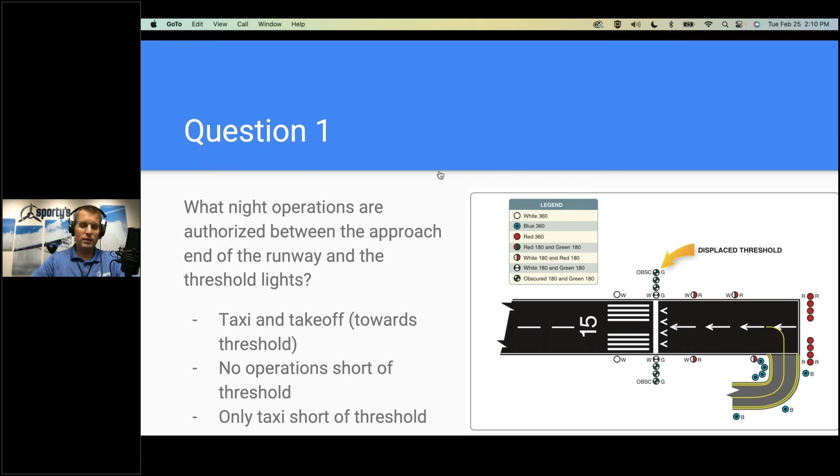Looks like the overwhelming winner here is A, taxi and takeoff towards the threshold. That's 72% of you voted for that one. Second place was C, only taxi short of the threshold. You are correct, good job everybody. A is the correct answer: taxi and takeoff towards the threshold. Only taxi short of the threshold was a pretty good distractor there. Some of you bit on that one, but A is the answer.

So why do we care? Let's do a quick review of runway markings, because we assume when we fly IFR that we're going to shoot an approach, and at the bottom of that approach is going to be the beautiful runway. And we did it, and we found our way out of the clouds, but it's not over until we land. And sometimes there's a moment of almost panic when you see the runway and where actually is the runway?

Which part's the runway? So to review, on the left, we have what's often called a blast pad, those chevrons. There's really nothing there. You should never be on that surface. That is an overrun, that is the blast pad, as it's alluded to. That is not for your airplane on it. The one in the middle, you notice there's a subtle difference there. It's still yellow, but there's a center line there. We can taxi on that, but because it's yellow, there's no takeoff or landing.

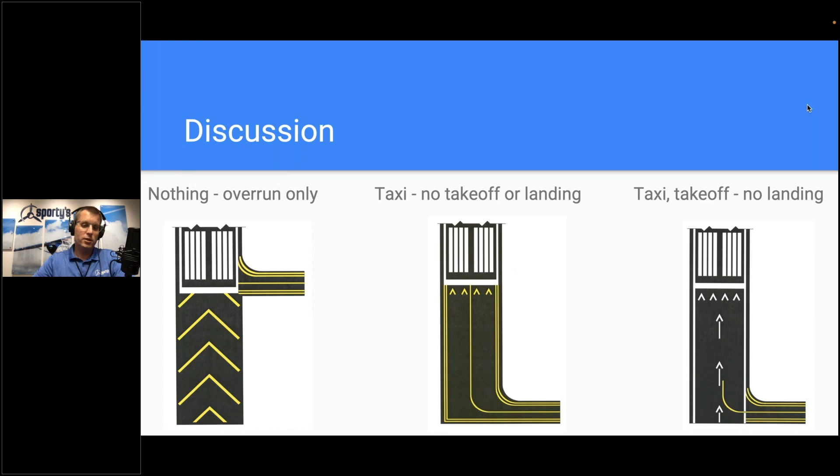That's just taxi. The one on the right, we have white and arrows pointing towards a threshold. That one we can taxi and take off on, but not land on. Maybe that's review for some of you, but I always like to go through the details because especially as you get to bigger airports, that can be a little confusing. So here's the way I remember it.

In general, yellow means a taxiway. So if you see yellow, even if it's in line with the runway, yellow means taxi, not runway, not takeoff and landing. White means runway. If it has a centerline stripe, you can probably use it as either a taxiway or a runway. If there's no centerline, like you see here with the chevrons, that means it's an overrun or a blast pad. So there are finer points and some distinctions, but in general: yellow taxiway, white runway.

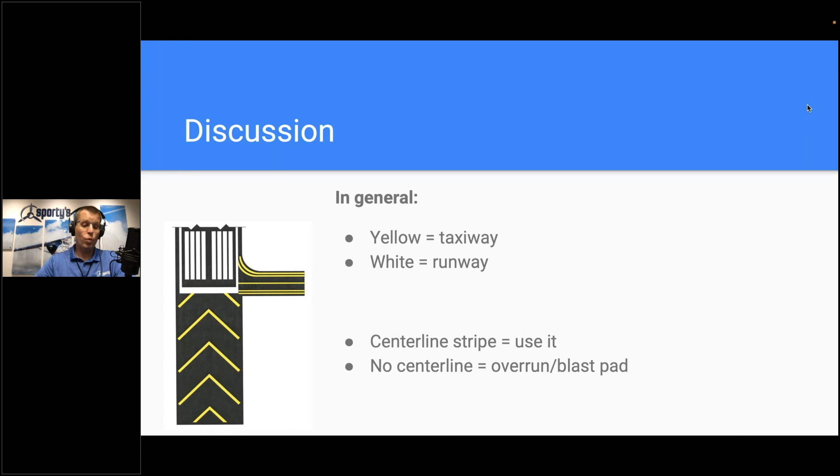Now at night, you can't see all of those, so we depend on the lights to help us there. When it comes to night, green is your friend. Not surprisingly, these colors are not picked at random. You can see in the example here on the screen, the green row across the threshold. That is your signal. That's where we can land.

So if you break out at the bottom of that approach, you can see here there's a blast pad and a displaced threshold. The white leads you to the green. The red says don't land here—you might be able to taxi there—but at the bottom of the approach, look for those green lights. That is the runway threshold. That is your friend, and at night, that's really what you're looking for.

When we talk about seeing the runway environment and being able to continue below minimums for landing, that green threshold line is about the best thing there is. All right, so there's a warm-up for you on runway lights.

Let's go to question 2. We're going to talk about icing. So approaching your destination, you pick up a half inch of rime ice in your descent through a cloud layer. You're now in the clear with unlimited visibility and a temperature of 35 degrees Fahrenheit. You decide to: A, not change your normal landing speed; B, approach with a slightly slower landing speed; C, approach with a slightly faster landing speed.

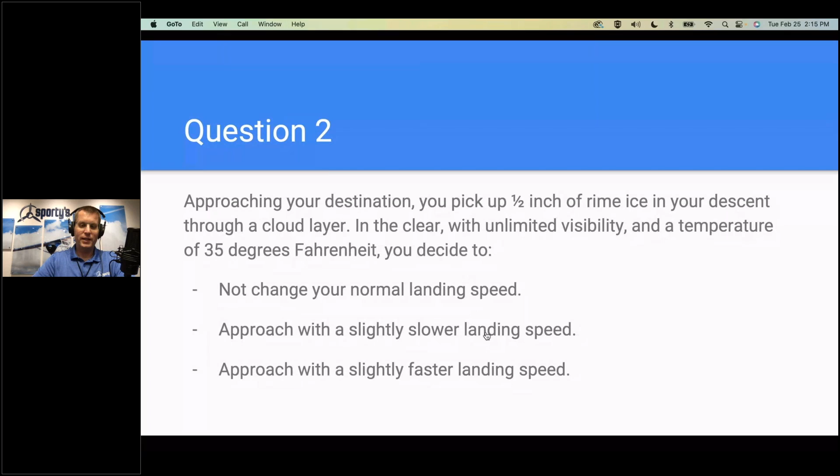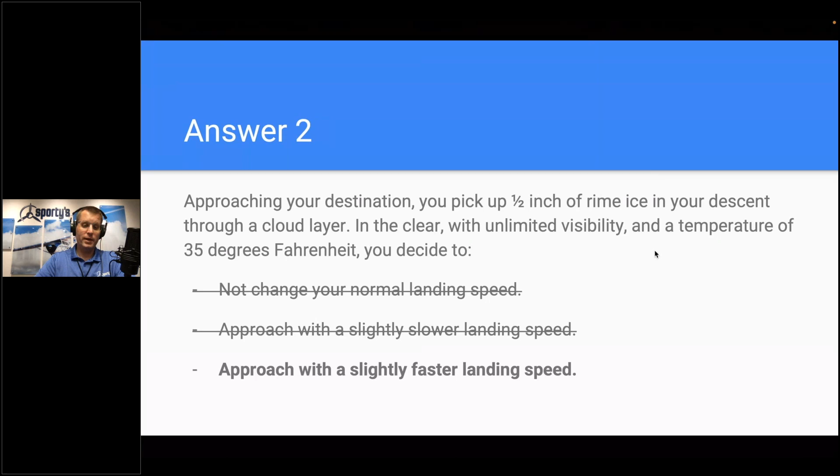All right, overwhelming—99% went with option C, approach with a slightly faster landing speed. Well, that did not fool anybody at all. And good for you, that is the correct answer: C, approach with a slightly faster landing speed. There was a little bit of a trick there—well, we already broke out, we're in the clear, the temperature's above freezing, so maybe we don't need to worry about that ice anymore. But you all did not bite on that, so good job.

This is all to tee up the conversation about icing, and my main takeaway here is that a little ice can make a big difference, especially on landing. I'd direct your attention to a great article on Airfacts, a website we do here at Sporty's. It's called 'In-Flight Icing's Hidden Threat: The Landing Flare,' written by Steve Green, a very experienced airline pilot and icing researcher. I'll quote just a little piece here that I think is relevant.

He says: what may appear to the pilot as a manageable drag rise due to a very thin layer of rime or residual ice following boot operation suddenly becomes an enormous drag rise during the flare maneuver as the angle of attack is increased.

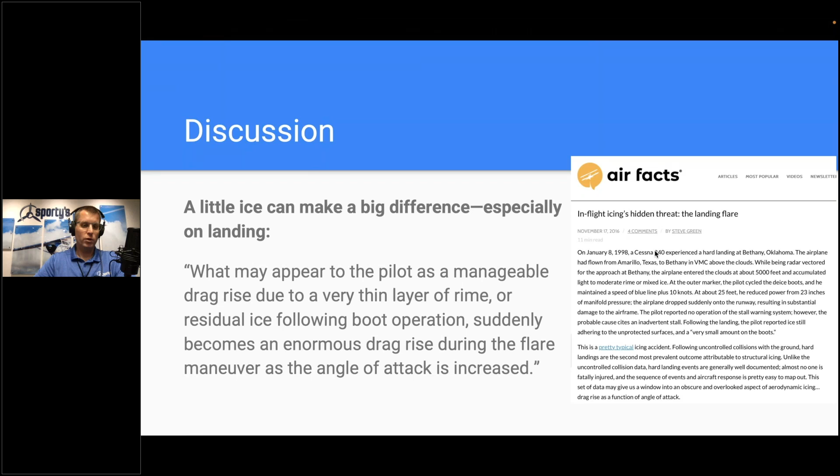The point here is you may be trucking along just fine with some ice on the airframe, but when you go to flare on landing, you can automatically stall that airplane at a much higher airspeed than you might be expecting. So everything can be working just fine until you're 10 feet off the runway, and when you go to flare, you might find the landing happens a lot faster. Maybe there's no damage to the airplane, but it could be a pretty rude awakening when those wheels hit the runway. The reason is the increase in drag is not linear.

So you see two curves here—this is a little technical, but pretty easy to understand. We have one with a clean airfoil and one with an airfoil with ice on it, and basically what we're showing is drag as angle of attack increases. You can see the airfoil with ice on it, the drag goes from not much to a lot almost instantly. So whatever we're used to in a normal landing flare, or even a stall, is not the same when we have ice on the wing.

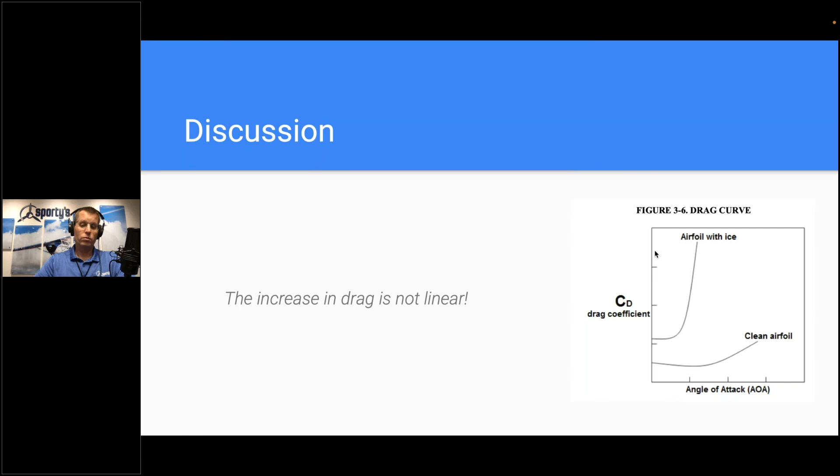And that just reinforces that we do need to add some speed if we still have ice on the airframe. This goes for an unprotected airplane, or a protected airplane if there's still ice on the airframe—maybe the boots didn't get it all. Do not expect a normal drag coefficient when you go to flare during that landing.

So when ice is on the airplane, even if you have boots or TKS on your airplane, generally a good idea to leave the flaps up, or if they're partially down, don't put them any further down. Fly at a faster approach speed and give yourself a longer runway. You don't need to add 25 knots, but if you're going to be adding some speed in some airplanes, it can be 5, 10, 15 knots. Give yourself more to work with.

Do not find yourself landing on a 3,000-foot runway with flaps up and a faster approach speed. If you run the math on some airplanes certified for flight into known icing conditions, more recently since the famous Roselawn crash in the 90s, they have very explicit landing performance data with ice on the airframe, and this can increase the required landing distance 50% or more. So if you're in one of these situations, go to the longer runway, maybe go to the next airport over with the longer runway if you have to, and give yourself more to work with.

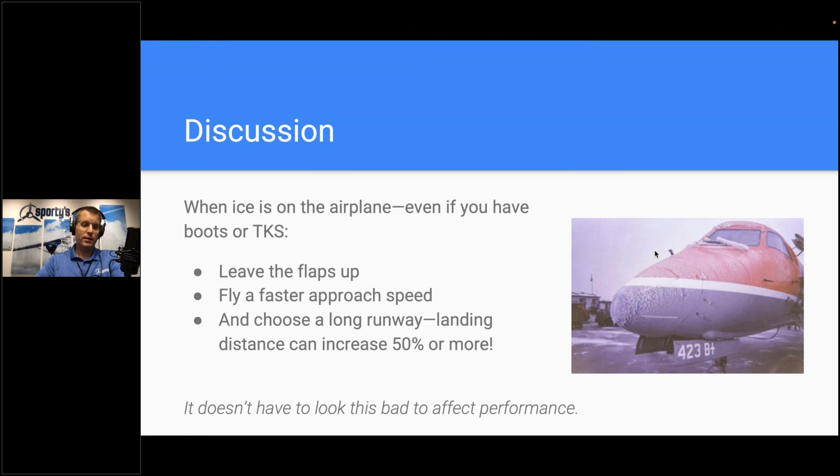All right, question 3. A little bit of regulation work here. Before beginning any flight under IFR, the pilot in command must become familiar with all available information concerning that flight, including: A, all instrument approaches at the destination; B, an alternate airport and adequate takeoff and landing performance at the destination airport; or C, the runway lengths at airports of intended use and the aircraft's takeoff and landing data.

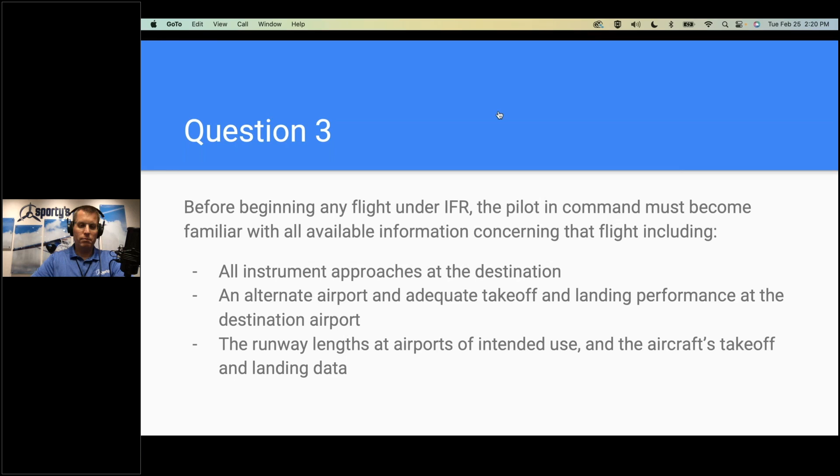All right, most of you went with C, runway lengths at airports of intended use and takeoff and landing data. 18% of you went for B, 3% went for A. So mostly all in agreement here, and again, you guys are on your game today. That is correct: C, the runway lengths at airports of intended use and the aircraft's takeoff and landing data.

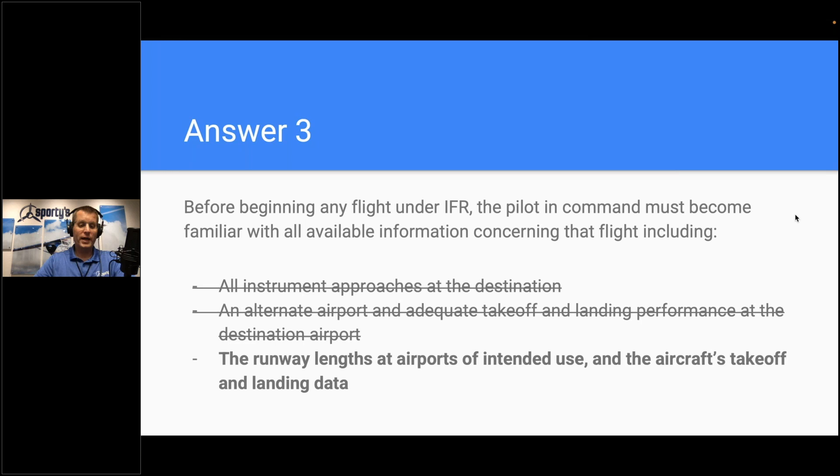A few of you went for B, which is what I was trying to trick you with, which is, hey, we're talking IFR, don't I have to pick an alternate every time? Or how about A, don't I have to brief the approaches? From a regulatory standpoint, the answer is no.

Don't forget to do your homework on the runways you're using and your takeoff and landing data. What's your weight and balance? How much runway distance do you need? Consider on a wet runway, maybe that matters, especially in higher performance airplanes, that can make a difference. So number one, don't overlook that.

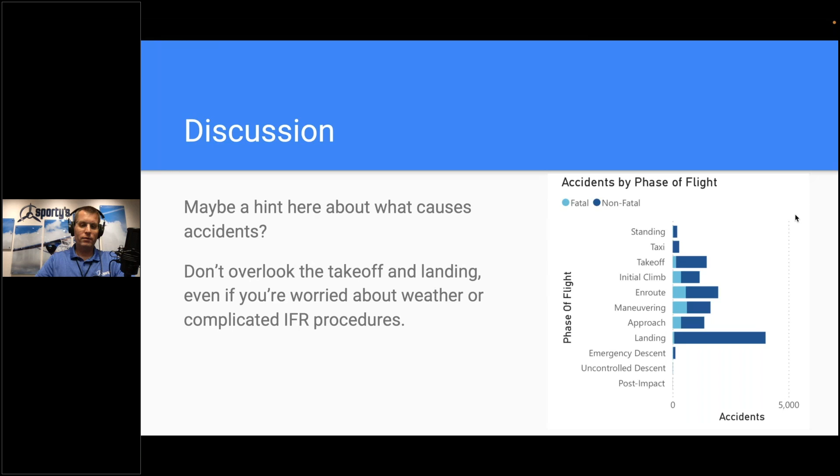Now, does that mean that you shouldn't look at approaches or departures before an IFR flight? I mean, no way. Absolutely not. Just because the regulations say one thing does not mean that's what makes a good pre-flight briefing. So as a reminder, if you want to go look at the chapter and verse, FAR 91.103 pre-flight action, this talks about what every pilot in command should do, and you can read about what you need there.

I honestly don't think that's that important. I think the key part is that the standard you have to hit for pre-flight action from a regulation standpoint is incredibly low. So what really matters is you developing your own pre-flight flow. What do you need to look at? Weight and balance data, runway performance data, weather, pilot competency, aircraft. There's a lot to look at, a lot to study, but don't get bogged down in what the FAA wants. Make it a flow that works for you.

So experiment with it, talk to other pilots, talk to a flight instructor, but I think every pilot needs to have almost an automatic habit of here's how I brief a flight. Maybe here's how I brief it 2 days before, 1 day before I dig in deeper, and the day of I look at a few last minute things.

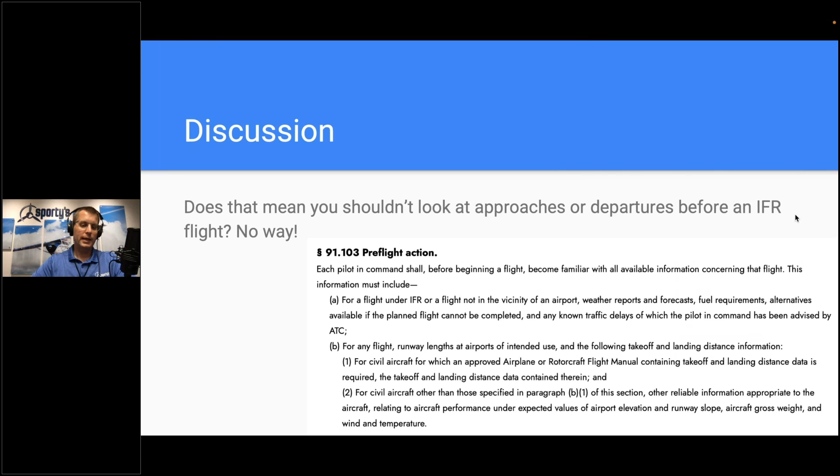That's really what counts, not what FAR 91 says here. All right, question 4. An instrument departure procedure requires a minimum climb rate of 210 feet per nautical mile to 8,000 feet. If you climb with a ground speed of 140 knots, what is the required rate of climb in feet per minute? A, 490, B, 450, C, 210. A little bit of math here, but you can probably estimate it if you need to.

All right, we've got a little bit of a split decision here, almost 50-50 between A and B. Everybody felt like it's somewhere in the 400-ish range, but 50% went with A, 46% B, 4% with C. So let's reveal the right answer, and that is A, 490 feet. So very well done, everybody. Most of you got it, although kind of a bare majority got that.

The reason I add this question is that to me, our brains think in feet per minute, not feet per mile. Pilots, we know about what climb rate we can get in feet per minute when we take off. We know descent rates we have to maintain in feet per minute when we shoot an approach. At least my brain does not think in feet per nautical mile. So anytime I see that on a departure procedure, I really want to think about it and make sure I've run at least some rough math to see if I can do it.

Lots of different ways to do it. You can obviously use an E6B calculator. You can use an app. You can do math with a scratch pad. Don't forget, in the front of the Terminal Procedures publication, the approach plate book, you've got this climb descent table where you can do climb in feet per nautical mile down the left side and ground speed on the right, work across there. So this is your friend. When in a pinch, this should be either in your paper charts or in your EFB app.

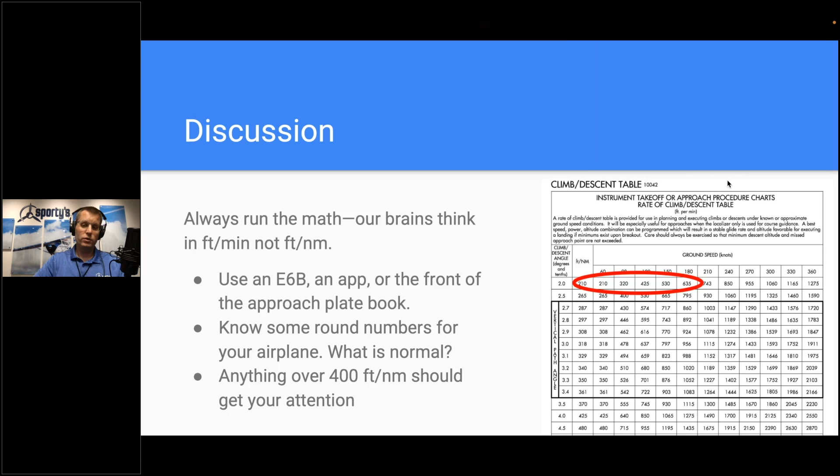So certainly not every airplane is Aspen, but that's an extreme example of where this really comes into play, and it's not to be overlooked. There's lots of hints here. Obviously, you're in the mountains. You'll notice the takeoff minimums runway 15 NA, terrain. That's a good hint that there's some big rocks around here. And so when you look at 33 and see 650 feet per nautical mile, and then ATC climb of 840 feet per nautical mile to 16,000 feet, do not just blindly accept that if your airplane can't do it, because that could be some pretty great performance if you're trying to coax that out of a Cherokee or a 182.

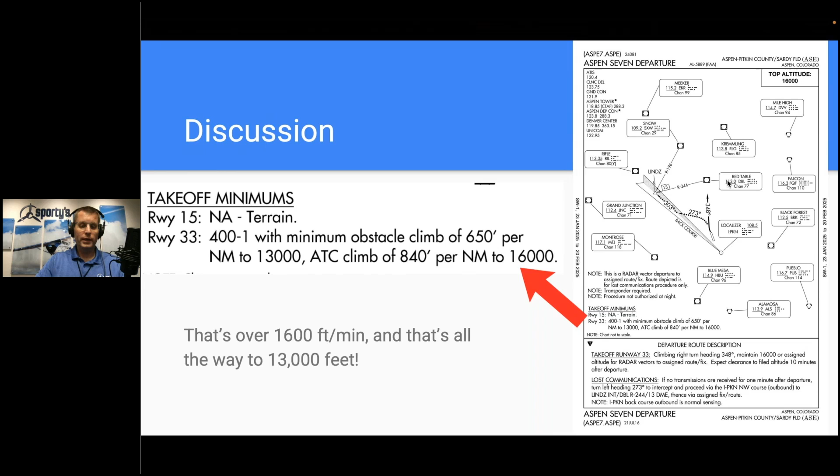All right, question 5. This will be our last written test question, and then we'll move on to the oral exam part. So number 5, when is radar service terminated during a visual approach? A, immediately upon acceptance of the approach by the pilot. B, when ATC advises radar service terminated, resume own navigation. Or C, automatically when ATC instructs the pilot to contact the tower.

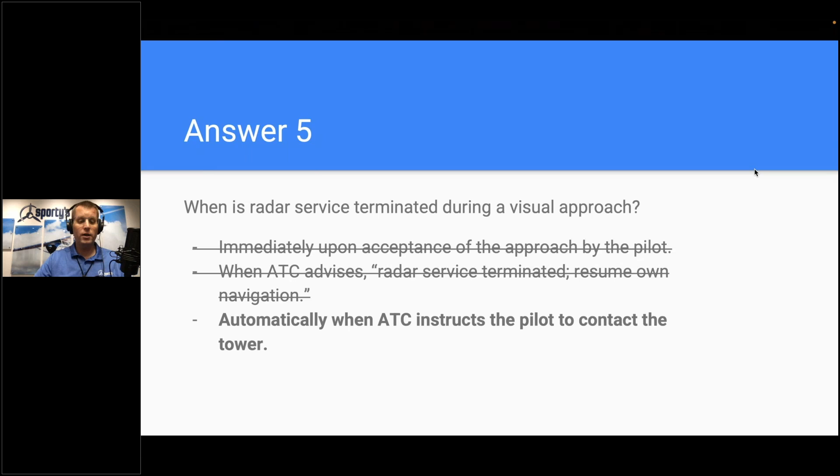All right, another little bit split decision here. 55% went with B, when ATC advises radar service terminated. 35% went with C, automatically when ATC instructs you to contact tower, and 10% with A, immediately upon acceptance of the approach. Yeah, this is a little bit of a tricky one, I think. Maybe something you haven't thought about before. I know I haven't thought about it a whole lot, but the correct answer is C, automatically when ATC instructs the pilot to contact the tower.

So this happens a lot. In my experience, probably 80% of my IFR flights end in a visual approach. And so you don't think about this much, but here's the actual quote from the AIM here. Radar service is automatically terminated without advising the pilot when the aircraft is instructed to change to the advisory frequency. So when they say cleared for the visual, contact tower, or cleared for the visual, go to Unicom, contact me on the miss, that's it.

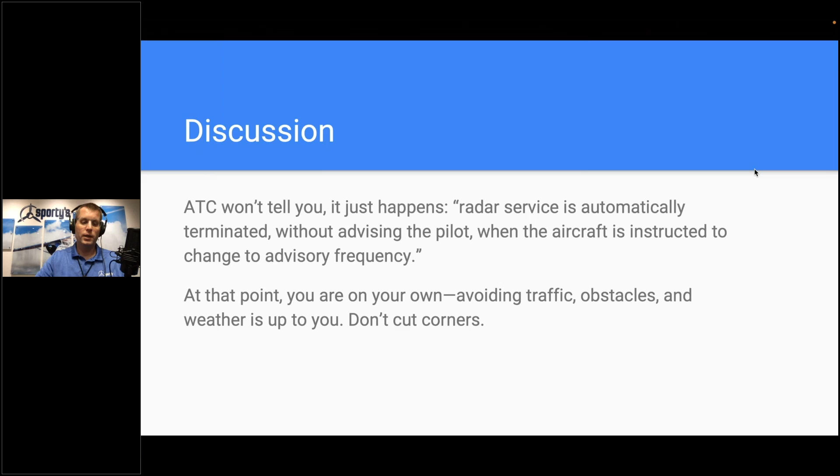At that point, you are on your own. Avoiding traffic, obstacles, and weather is up to you. So it's not meant to scare you, but just to remind you that when you're cleared for the visual and they kick you over to tower, ATC is basically out of the game from the standpoint of obstacles, traffic, weather. They're going to be helpful if there's a tower, certainly, but it's pretty much on you. You've accepted that responsibility.

So a couple reminders here when we talk about a visual approach. It can't just be issued randomly. Pilot must have either the airport or the preceding aircraft in sight that you're following. It must be authorized by ATC. You can't go do it on your own. And then finally, airport must have a ceiling of at least 1,000 feet and 3 miles visibility. This one is, I think, often forgotten by pilots. Seems just obvious that if I have the runway, I can land there, but technically, that's what the book says.

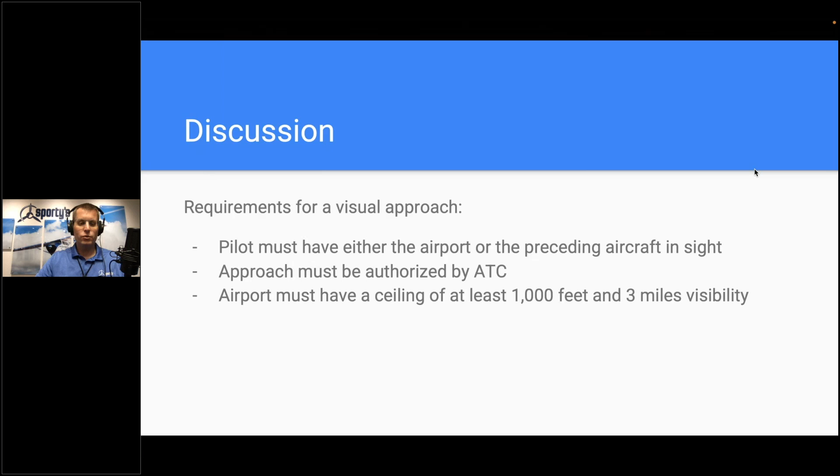AIM, Chapter 5, Section 4, Part 23 is where you want to go if you want to read up on this. And there's a couple parts here I think are interesting. One is a reminder, visual approaches are an IFR procedure conducted under IFR in visual meteorological conditions. So yes, it's a visual approach, but you are still IFR. If you fly a visual approach to Atlanta Hartsfield Airport, you are absolutely still on an IFR procedure, and you are conducting it under instrument flight rules, talking to the tower. It's just not a charted procedure, and you're maintaining your visual reference to the airport, but still an IFR procedure.

The second part is when conducting visual approaches, pilots are encouraged to use other available navigation aids to assist in positive lateral and vertical alignment with the runway. Maybe obvious, but just because you're doing the visual doesn't mean you can't load up something in your GPS. Many newer ones have a visual approach feature you can load. Even without that, you may want to load up the backup RNAV approach or ILS. Certainly does not hurt to have something there to check and make sure you're flying the right approach to the right runway, especially at night.

Get cleared for the visual approach, pretty much automatically I'm going to be putting something in the GPS so I have some CDI or HSI that I can look at and make sure I am lined up with the correct runway, or frankly, even the runway. Sometimes taxiways, roads, you never know, can look like it. So just because you think you have the runway in sight, it doesn't hurt to back it up.

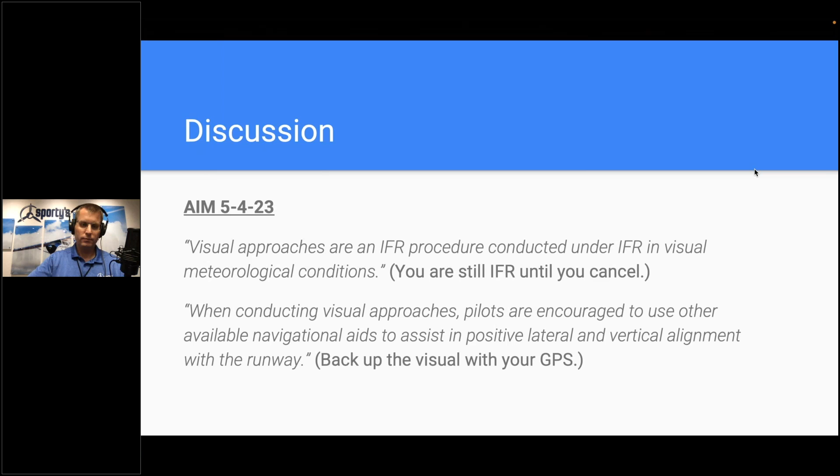All right, that was the written part of it. Let's talk about the oral exam. So we're going to shift modes a little bit here. Let's assume you've passed the knowledge test and you're sitting down with the examiner now. This is before we go flying, some topics. These are a little more open-ended, so this won't be quiz style. There's no ABC correct answer here. I'm going to pose some questions, ask you to think about it a little bit, and then we'll talk through the answers as you might with the examiner on check ride day.

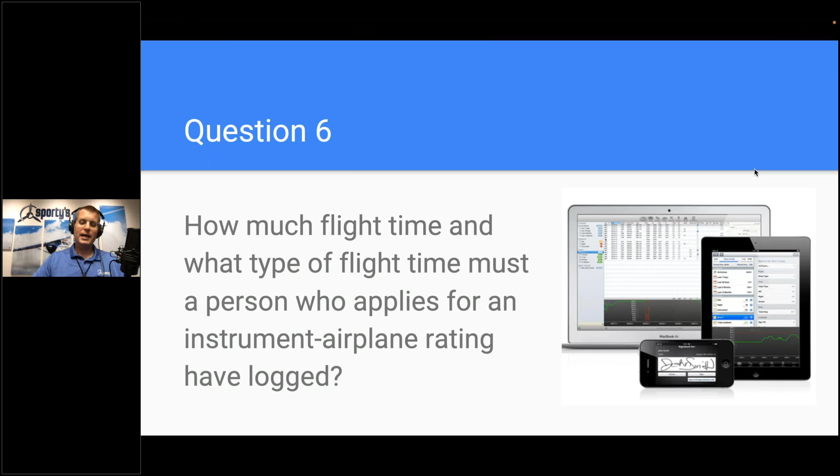So first, question 6, how much flight time and what type of flight time must a person who applies for an instrument airplane rating have logged? So this is often the first thing that happens. You sit down with the examiner and they'll say, hey, let's make sure you can even be here. Let's make sure you're qualified. So what do you need to apply for that instrument rating and take the check ride? Well, you may not have all these right at hand, but let's review them. 50 hours of pilot in command cross-country time, 40 hours of instrument time, including 15 hours of dual. There's some footnotes in there you want to pay attention to.

You need to have 3 hours within 2 months of the check ride, which I always point out because right now examiners are pretty overbooked, and sometimes you can schedule your check ride months in advance of when it actually happens. Well, make sure you get 3 hours within 2 months of it. You want to be current going into it. And then there's that long cross country, 250 miles total distance, 3 different kinds of approaches. So those are the highlights there, but let's dive into a couple details here.

Number one, 61.65, that's the FAR if you want to go look at every last detail of it. 40 hours of instrument time, well, what does that mean? What about simulators? These are increasingly common at flight schools. Can't I use a simulator for some of this? And the answer is yes, you can use a simulator. Up to 10 hours of instrument time can be credited in a basic aviation training device or a BATD, 20 hours in an AATD, an advanced aviation training device.

But remember, these are typically larger, more expensive, quote unquote, approved devices that you'll find in a flight school. This is not a flight simulator you've got at your house, most likely. I cannot just run Microsoft Flight Sim with a Honeycomb Alpha yoke and log time. These have to have a letter of authorization. They're usually approved to be used with an instructor and for certain maneuvers. So it's not just a blanket, get in the sim and use it. It needs to be an approved sim in the approved use.

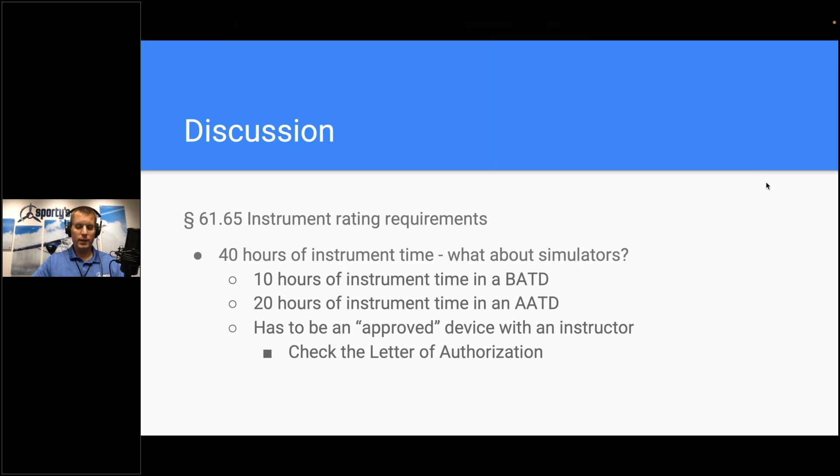Another note, on the 50 hours of PIC cross country, that's not required if you're training in a Part 141 school, which are reasonably popular. I don't know, maybe half the flight schools out there these days are 141. These are so-called FAA approved schools that use an approved training course outline.

So for example, a localizer and an ILS are different approaches. An RNAV that you shoot to an LPV is different from one you shoot to an LNAV with an MDA. So we could go do that cross country and shoot an ILS and an LNAV and an LPV, and we use the GPS unit for basically all of them. The ILS, obviously the radio needs to be primary, but that counts. So don't get too caught up in the minutia there. In general, if you're using different minimum lines on the approach plate, you're going to satisfy the requirement for different approaches.

The other thing I'd point out here is if you are actually going for a check ride, have these key areas tabbed in your logbook. The examiner is almost certainly going to ask for these, and you'll save time and look more professional if you show up prepared and can say, bam, here's my 50 hours PIC cross country. Here is my long cross country, 250 nautical miles. It really makes a good first impression if you've done your homework on that.

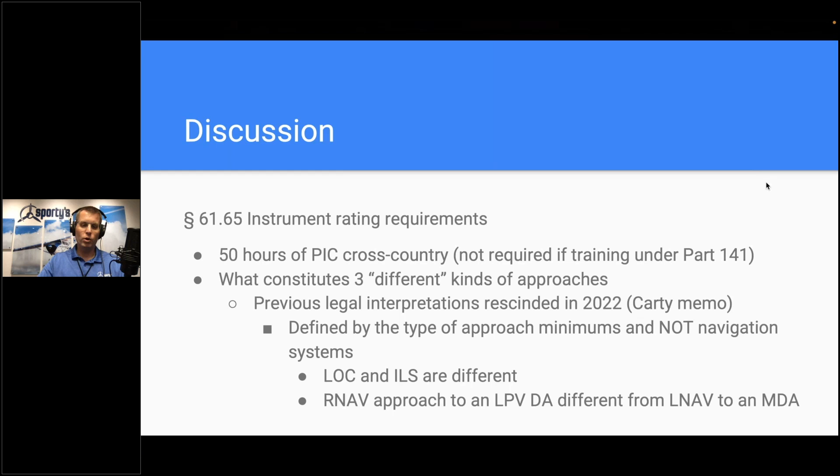All right, question 7. Under what conditions are you required to initiate a missed approach? Sounds like a fairly simple question, but give that some thought here and then we'll talk through it. All right, the AIM once again is your best friend here.

5-5-5. There's a couple things that are obvious here and maybe a couple that aren't as obvious. Number one is what we all think of. We arrive at the missed approach point without proper visual reference. So you descend to MDA on that LNAV approach and you level out and you're looking and you're looking and you're looking and you do not see the lights or the runway environment. Well, that's a missed approach. Off we go, hit the power.

Again, don't overthink it here, but as I mentioned in that very first question, what are we looking for when we say the runway environment? Obviously, the runway itself, the numbers, if you see runway 22 on the pavement for runway 22, those lights are a great one. That green threshold light's a good thing to look for. Just because you see some part of the airport environment is probably not enough for you to safely continue. So that's the obvious one.

The second one I think is maybe the most important. You should go missed anytime a safe approach and landing is not possible, whether you have the runway or not. Maybe the ceiling was 1,000 feet and the visibility is 10 miles. But if you flub the approach and you're way too high and way too fast, and you're going to have to do an extreme slip to slam it on the runway, that is a missed approach. Automatically, you need to go around. It's not just about weather. So keep that in mind for sure. And that is encoded in the regulations there. You need to be in a position to make a safe landing from that instrument approach.

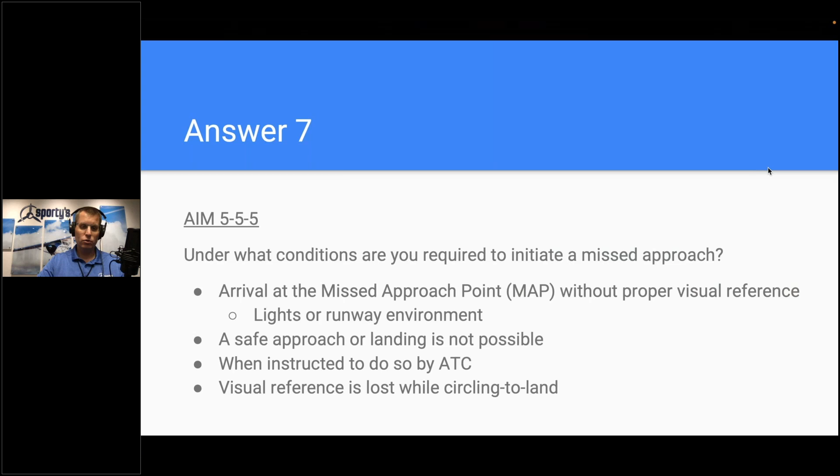How about some other reasons? How about course deviations? What if I'm just flying a terrible approach? That one, you've got some leeway, but basically if positive navigation is in doubt, and I would say 3/4 or more CDI deflection, great standard there, go missed. Because if that CDI gets fully pegged, you don't know if you're a half mile off or 7 miles off. So if it's in doubt, go missed.

In that case, let's say we do have to go missed and we're well before the missed approach point. This is an area that I've seen some check ride busts on. What if I go missed and I'm still 5 miles from the missed approach point or from the runway? Continue to fly the approach course at or above MDA. So climb for sure, get some space between you and the hills, but do not make a turn. Because if you're still well short of the missed approach point, remember, everything on that missed approach procedure is predicated on you starting the missed at the missed approach point. So don't go making anything up if you go missed early. Keep flying that approach course. Get the needle centered if you can, but definitely start climbing.

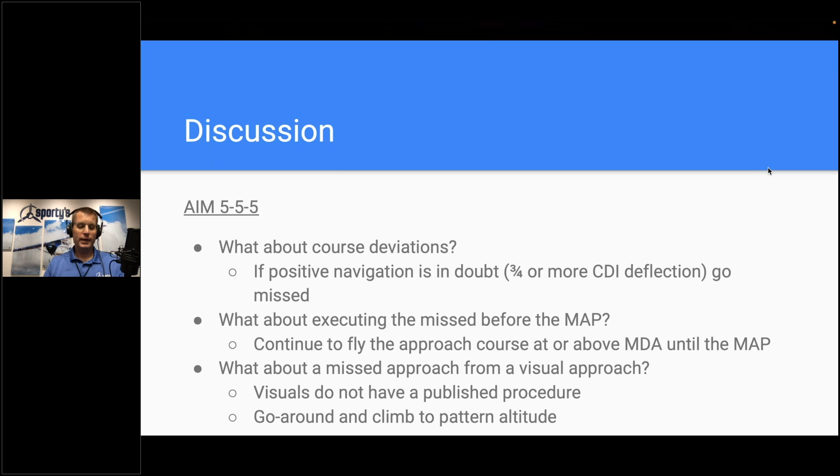And then how about that missed approach from a visual approach? We talked about visuals earlier. That is an instrument procedure. Well, the answer here is you're kind of going to make it up, unfortunately. There is no published procedure for a visual. You typically will not get told one from ATC when they clear you for the visual. I don't think I've ever heard cleared for the visual, if you go missed, fly this heading and altitude. So the answer is basically go around, roughly line up with runway heading is going to be safe. Get to pattern altitude. You want to get altitude number one, and you want to start talking.

So from that missed approach, sort of related to the visual here, and this is in the Instrument Flying Handbook, which is actually a pretty good read on this topic. What if I am on that circling approach, which is essentially kind of a visual approach at that point, and I lose sight of the runway? What do I do then? Well, critical point here is climbing turn towards the runway. So you want to get to that missed approach procedure, or the missed approach course, but you want to climb to the airport.

Get some altitude and turn over that airport, because a lot of times your protected area around the airport on a circling approach is not much, and you'd much rather be over the airport figuring it out than over some random hill somewhere trying to figure it out. So, climbing turn toward the landing runway, get over the airport, and that is a great time to communicate.

Definitely aviate, navigate first, but then communicate. You're going to need to talk to tower or approach and get a new plan. Missed approaches, very important. We don't do a ton of them. We tend to practice them, and in real life, most of our approaches end up successful. So if you haven't practiced a real missed approach in a while, I highly recommend it. I had to do one somewhat recently in bad weather, and it worked out fine, but I'll admit I was not really current on doing missed approaches because we just don't do them that often.

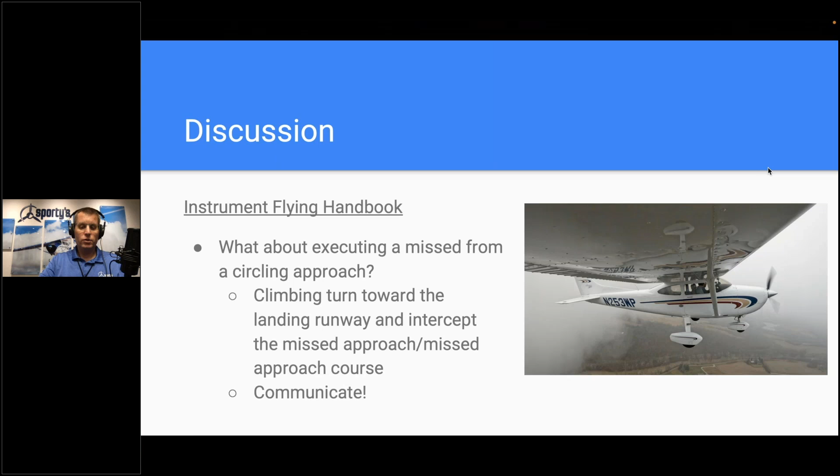All right, number 8, we would, of course, not have an IFR quiz hour without talking about lost communications. This is everybody's favorite. And it's a little academic, but I do think it's actually important because this can and does happen. So what are the lost communication procedures when flying under IFR? We're buzzing along and nobody's home on the radio. What do we do?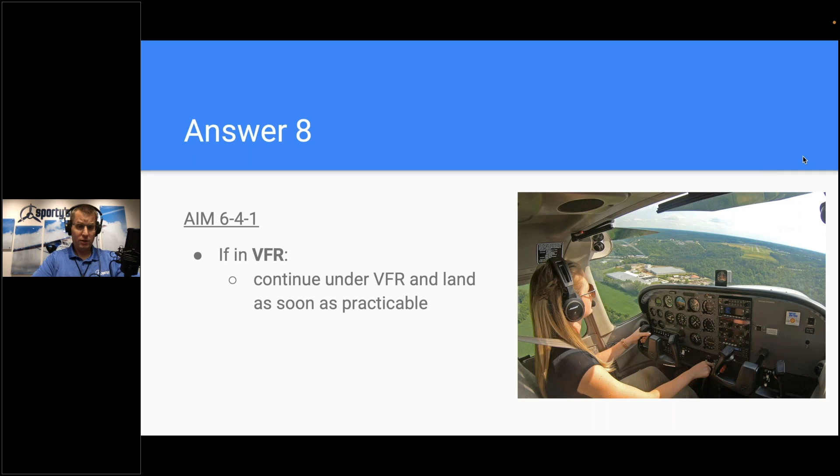Well, there's multiple steps here we'll walk through. And again, I'll give you the reference. You can go read it if you want in the AIM 6-4-1. The easiest answer here is if you're in VFR or if you're close to VFR, get VFR and land, because all the other things here are great, but if you are in VFR, do not overthink it. Land at that airport and solve the problem on the ground, not in the air. I think everybody knows that, but it's always worth reiterating, because usually this conversation quickly gets into all the minutia of altitudes and routes and everything. But a lot of our IFR flying happens in visual meteorological conditions. So if you're VMC, go land. But of course, for the purposes of this check ride, we're going to assume we're IFR.

It's 200.5 everywhere. So we want to start with route. What route should I fly? Well, the easiest one is the last one assigned in an ATC clearance. So if we are flying along an airway towards a VOR and we are cleared to our destination via that route, keep flying that. If you had a radar vector, if ATC told you turn left heading 210, vectors final approach, runway 22 approach, well, fly that vector to the fix. They told you what to expect, and basically the whole reason they tell you what the purpose of their vector is, is for this lost comm scenario. So you'll almost always hear that if ATC is doing their job, they won't just randomly give you a vector. They'll give you a vector and a reason for it.

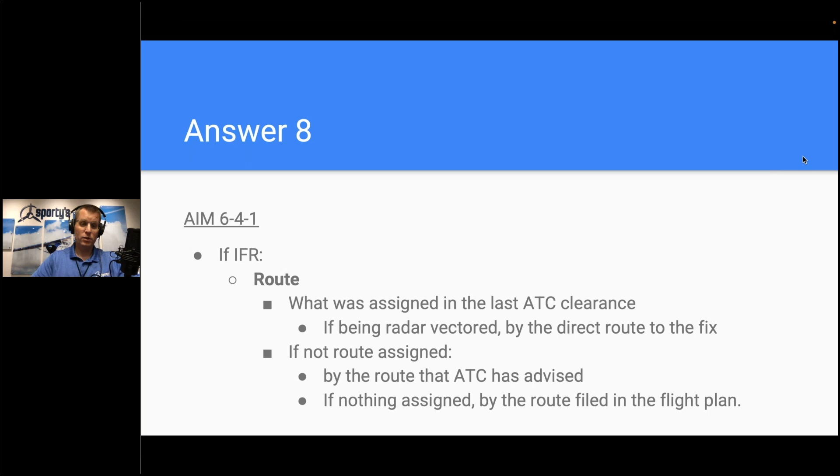That's why. If there is no route assigned, go by the route that ATC has advised. And as a catch-all, if nothing's assigned, we're really out there on our own, go by the route filed in the flight plan. That's what ATC is going to be expecting. That's probably the path they're going to clear for you. And lacking all other information, they'll go to that and say, well, he filed this, so let's clear that airspace and assume he's going to go fly that route to that approach to that airport.

Altitude. So if we're IFR, the highest of the following, again, always better to be too high than too low here. The highest of the following three options: the altitude assigned in the last clearance, so if ATC said climb, maintain 6,000, and you're on the way up to that, keep climbing, maintain 6,000. However, if the minimum altitude for IFR operations is higher than that, well, we want to go even higher. Or if the altitude or flight level ATC has advised may be expected. So this is, again, in the standard clearance. You'll often get cleared on departure, climb, maintain 2,500, expect 6,000, 10 minutes after departure. That's what that's there for. They don't want you to be buzzing along at 2,500 feet forever. That expected means if you take off and lose communications, you can expect to climb at that altitude, so you can, in the case of lost comms.

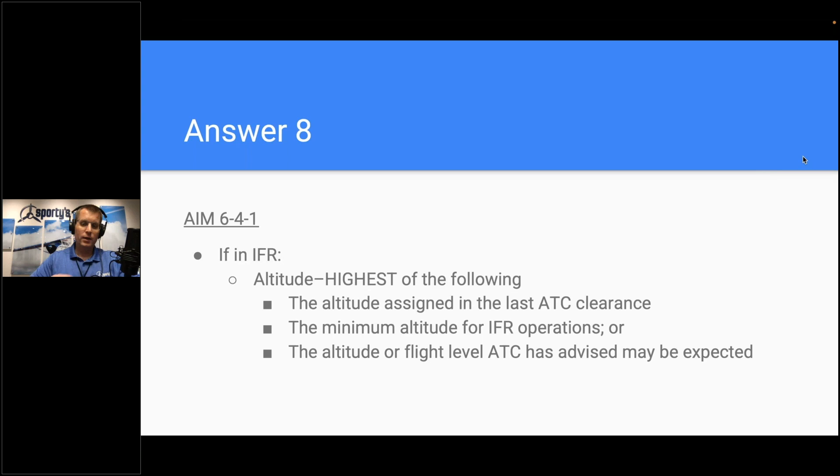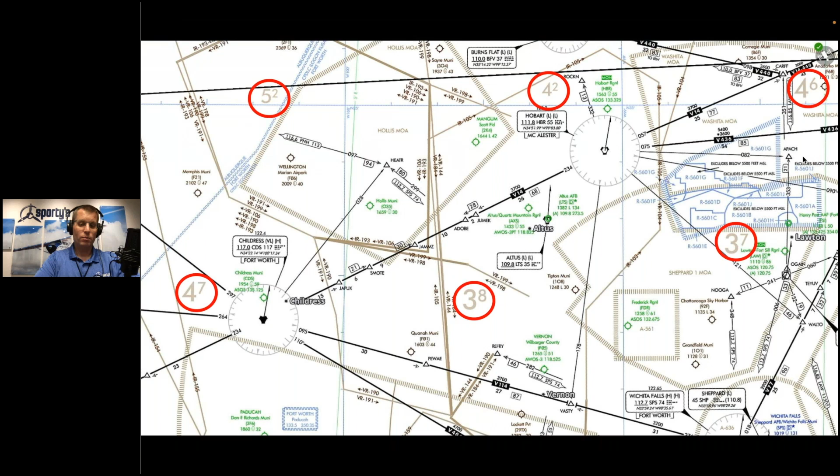But don't forget about the OROCA altitudes. Those are the beige ones circled on this slide. A lot of times these days we're not flying on airways, especially outside the Northeast or Florida. So if we're off route going direct to destination, those beige numbers are your friend, those are the ones you're looking for. That's the legal part, and that's what the examiner on a check ride would ask for. But I just want to focus on a couple practical things here.

Check your equipment, because about 90% of the time lost comm is not actually the radio smoking up, especially with modern radios these days. It's that you, the pilot, have done something wrong. We've all been there: you're on COM 2 instead of COM 1, you have the volume turned down, the intercom selected on the wrong one, the headsets unplugged. There's all kinds of little things that can go wrong. So when in doubt, be humble and assume you messed it up, because you may be able to get ATC back in a hurry.

Check your frequency. You can check that on your iPad app for sure. Check the intercom, check the volume. Sounds simple, but I've done it countless times. It can and will happen to you.

Monitor 121.5. It's possible you flew out of range of the frequency you were on and ATC forgot to give you a frequency change. In that case, monitor 121.5, they will probably come on there and try to reach you. They'll call out, 'November 12345, Cincinnati approach on guard, if you hear me, contact me on this frequency.' That is exactly why, if you have a COM 2, you should pretty much always have 121.5 dialed in on COM 2 in the background. I do not fly cross country without that in the background. I'm talking ATC on COM 1, and I've got the guard frequency, 121.5, on COM 2. It's for exactly that reason.

If you don't hear them asking for you, you can try to reach another pilot, because many pilots are flying along monitoring that. So you can say, 'Hey, anybody on guard, hear me? I lost ATC, can you help me find a frequency?' This happens all the time, and it works pretty well.

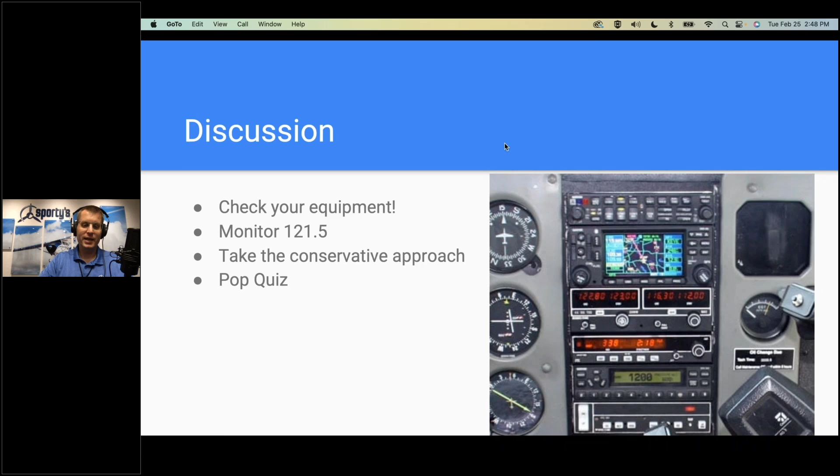So I have a quick pop quiz here, because of course there's one other part: lost comms might mean the radio isn't working, but maybe the transponder is. So here's the question: what is the appropriate squawk code for lost communications? 7500, 7600, or 7700? Alright, well done, didn't fool many of you. 87% went with B, 7600, 7% A, 6% C.

You're correct, 7600. As a reminder, 7500 is hijacking, probably not one you want to squawk, it'll get you attention in the ATC control room but not the kind you want. 7600 is lost communications. 7700 isn't necessarily wrong either, that's just general emergency, nothing wrong with squawking that, it'll light up the controller's screen and they'll clear the airspace. But 7600 is the correct answer here.

So here's how I would think of it as a pilot and also as an applicant on a check ride. First, let's start with the ATIS info. Theoretically we're in cruise here, we pick up the ATIS, we hear the visibility, ceiling, temperature, altimeter, runway, and approach in use. You want to compare that and ask: does the approach I have in my hand make sense for the conditions I just heard on ATIS and for the equipment I have in the airplane?

Not every approach in that approach plate book is usable by every airplane, and certainly not every approach makes sense given the weather conditions.

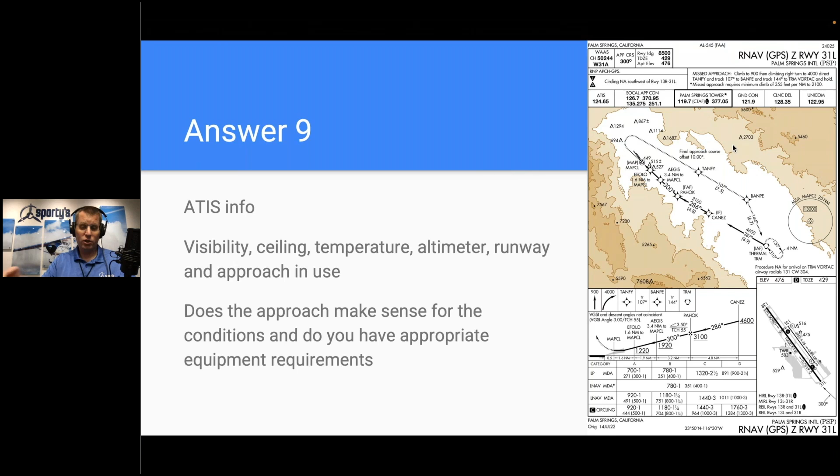Now that we've done that, we can actually go on and brief the approach. So I like to think of it in these 6 steps. You may have a different approach. There's lots of mnemonics out there. This is kind of how I think of it.

So number 1, confirm the approach. This is both the approach type, the runway, and the airport. Sounds obvious, but this is the magic of discipline and doing it the same way every time. We are going to Palm Springs International, right? PSP, correct. That's the right airport.

We are flying the RNAV approach. Is that correct? Yes. Sometimes ATC likes to clear you for the ILS. So let's make sure we're briefing the one we are expecting or cleared for. And then let's make sure it's the right runway. Again, some airports can have multiple parallel runways. So make sure we've started with the right approach.

Number 2, what is the final approach course? This is one of those big headline numbers. If you can only remember a couple numbers, remember that. The approach course here—and again, approach charts are laid out in a pretty systematic way—up at the top there, approach course 300. That is in bold for a reason, because when in doubt and we're overloaded, that's the number we need to know: when we are headed towards the missed approach point, 300 is our desired inbound track.

Number 3, what's the navigation source? These days, a lot of the time it's GPS, so this may be easier than it once was, where we would have a VOR, an ILS or localizer, GPS, or an NDB. But it's still worth confirming.

The big one here is if you fly with a Garmin 430, 530 in particular, that CDI button. If you're actually flying an ILS approach and you've been using GPS the whole trip, don't forget to flip it to VLOC. That's basically what this step means for me: I'm cleared for the RNAV approach, I'm flying an RNAV approach, so the avionics I'm looking at need to be saying RNAV. I don't need to have it on ILS or VOR. If you're flying an ILS approach, obviously vice versa, but that's a good check for one of those killer items. You want to make sure you're tracking the correct CDI that's feeding from the correct avionics source.

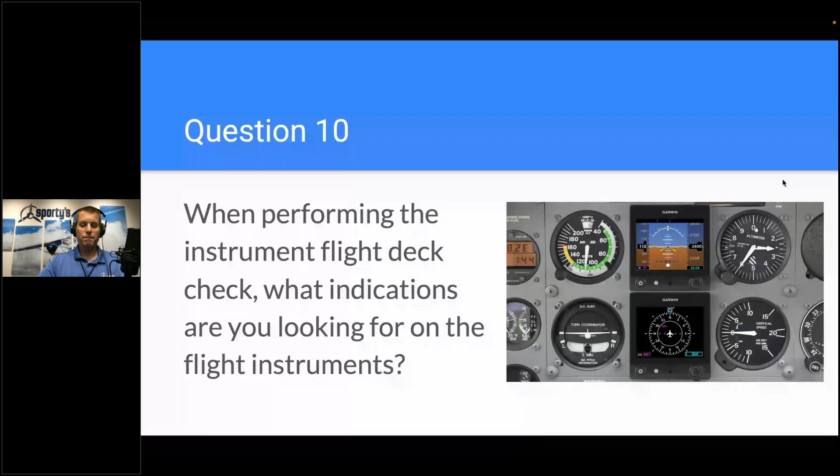Here's one that people overlook a lot, that's kind of why we put it in here. We're not even in the air yet, what am I looking for on those flight instruments? Well, here's how I look at it. I basically walk through in a flow pattern of the instruments on the panel.

So we start with the compass. Yes, I don't look at the compass when I fly, but it's required equipment in pretty much every airplane, so you need to check that it moves freely and is full of fluid. I have heard of pilots having incomplete check rides because the compass had no fluid in it. I think that's harsh, but apparently it can happen. So we want to start there.

And then we can move down into the six-pack. Airspeed, it should be at 0 when we're on the ground, and we should check that it comes alive during the takeoff roll. I do this in every airplane. It should be 0 when we're parked in the chocks.

And as we roll down the runway, before we have too much speed, I should see that it's alive and accelerating normally. That's a great time to check and make sure we did not leave the pitot tube cover on. Moving across the 6-pack here, attitude, no greater than 5 degrees of bank. Altimeter, you should have it set properly per the ATIS or the AWOS, or barring all of that, field elevation. If you set it with the ATIS or AWOS, it should be within 75 feet of field elevation, so it's rarely going to be perfect. But certainly if the field elevation is 500 and your altimeter is saying 800 feet, you probably have a problem, either that you misset it or that your altimeter is going bad.

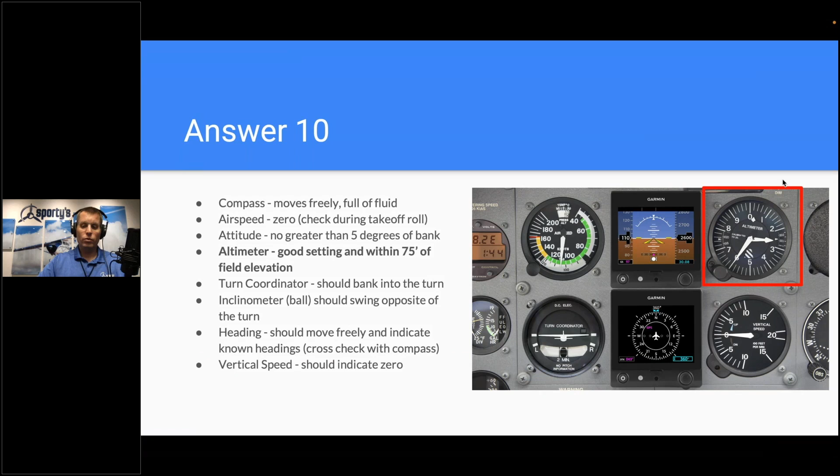Turn coordinator, it should bank into the turn. So as we taxi around the airport, you should bank. And the inclinometer, or the ball, should swing opposite of the turn. That's a good way to verify that that device is working properly. Heading, it should move freely, so it should turn as we taxi, and it should indicate known headings. You can cross-check this quickly with the compass to make sure that's working. And then vertical speed should be at 0 because we're on the ground. So that seems pretty intuitive.

We probably all do a version of this when we taxi out, but it's just a good reminder that the time to find an instrument problem is on the ground before takeoff, not when we're 100 feet in the air in a very precarious position. So there's a lot of these quick checks. It takes about 6 seconds to just run through this and make sure they're doing the right thing. This is a pretty good habit to get into, especially if you jump back and forth between airplanes. It's good to be skeptical and make sure the instruments are all saying what they should be saying.

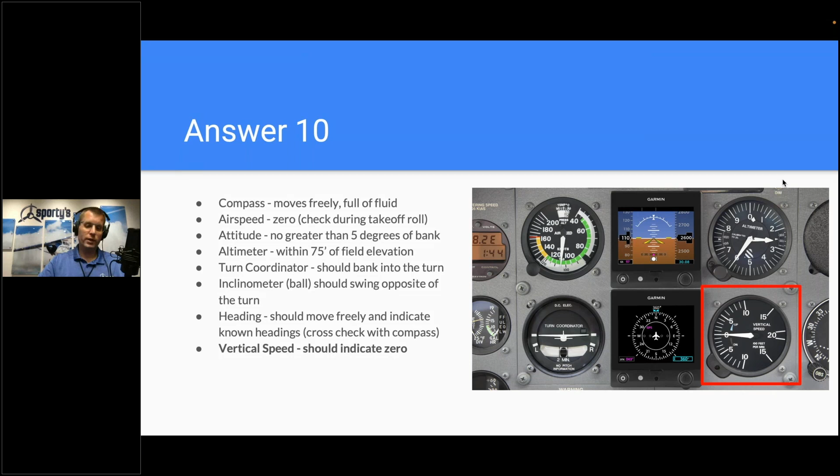And again, there are other things to look at. So maybe on the oral exam, the examiner is not going to want to hear all of these, but I like to do more than just those basics on the flight instruments. Avionics is a huge part of flying IFR these days, so make sure your comm radios are set. If you've got tower in the top of the frequency, you want to have departure in the bottom in the standby so you can quickly switch. You want to make sure that nav source, that's GPS VLOC setting, is set correctly. You want to have the autopilot set, maybe tested, maybe ready, maybe the flight director's on. It's going to be different in every airplane, but have that set up so that you're not going heads down right away after takeoff to mess with that.

Have the altitude selected. Most of us are flying with some type of altitude pre-select these days, even if it's just a G5 like you see here, where you can dial it in. Even if the autopilot's off and you're not going to use it, you can still use that altitude selector. That's a great reminder. So that should be set. If ATC told you climb and maintain 2,500, set that in there. Charts should be ready and accessible, whether that's paper or iPad. Have that ready for the chart you need. So if you do need it, you don't have to go heads down.

And then make sure the flight deck's secured. Make sure your passengers are ready. Make sure your flight bag is out of the way. Nothing's blocking the controls, so that you can keep your head up for taxi. Because once we do start moving, we don't want to be heads down programming avionics. You want to be head up, looking out, looking for other airplanes, staying on the center line when you taxi.

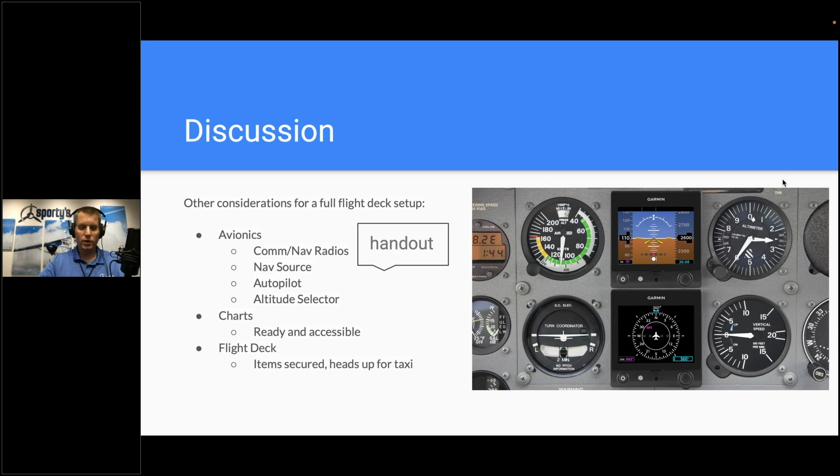All right, folks, we did it. 10 questions there in IFR Quiz Hour. Thanks for your attention. Great work. Tried to stump some of you, but you all did a really great job on both the written test questions and the oral exams. Hopefully those questions were helpful for you, maybe knocked off some rust.